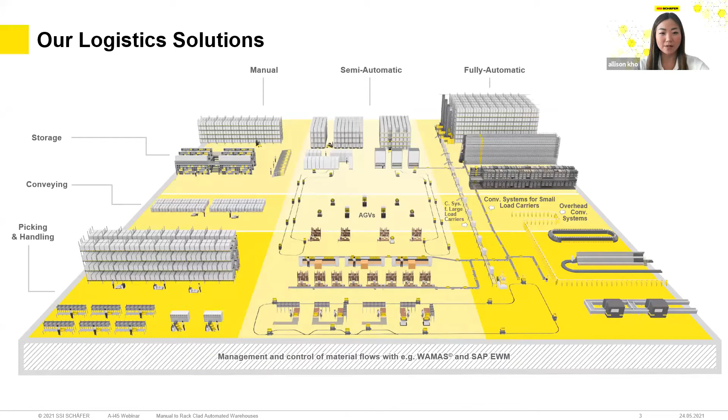With over 83 years of experience, you can find SSI SCHAEFER across 6 continents. The headquarters is based in Germany, and the regional office for Asia Pacific and Middle Eastern Asia is based in Singapore. A short drive across the causeway, you can find SSI SCHAEFER Asia's own production facility based in Malaysia, Simpang Renggam.

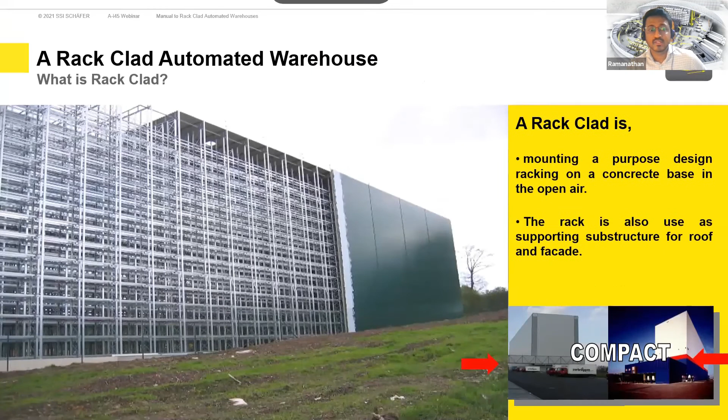Number 5 is space utilization. In many cities, space is always a constraint. Therefore, optimum space utilization inside a warehouse is necessary. Are you using the space efficiently inside the warehouse?

Number 6 would be the collaboration between robots and human beings. Is there a warehouse management system inside your warehouse that can act as a bridge between your inventory and operators? These are the questions that will get you ready to future-proof your warehouse.

Thanks, Ram. So bringing back to future-proofing a warehouse again - earlier on, Chan, when you said about having to have rackings in a warehouse itself, we talked a little bit about the size of the warehouse. Perhaps can you share a little bit on this detail?

Sure, I would love to. When I started with SSI SCHAEFER 26 years ago, we were excited to have a 25-meter high, 10,000 pallet location warehouse project. Now we are talking about a warehouse size of 100,000 pallets at a height of 40 meters or more - almost double the height with 10 times the storage capacity that we would never have thought possible back then.

I agree with Chan. The inquiries that we get these days are for more than 100,000 pallet locations, and this was not even the case 5 years back. Exactly. This trend translates into the bigger the warehouse, the better it is. And the Rack Clad solution has the edge to build big, so the demand for Rack Clad warehouses will grow.

Chan, sorry to interrupt - so you mentioned Rack Clad warehouses. For the benefit of our audience who are not very familiar with this term, do you want to explain what a Rack Clad is in layman's terms?

Okay, in this case, let me ask Allison a question first. Why do we have racking in the warehouse building? I think it's just purely to store pallets, and that's why we need the rackings. Okay, now imagine this: what if there is no building? Can you have the racking in place? This is what we call a Rack Clad.

It's a self-supporting storage rack system that can withstand environmental forces and at the same time can be used to support the roof and wall facade. Due to its self-supporting nature, Rack Clad does not require building columns, and this makes the Rack Clad solution more compact compared to conventional warehouse solutions.

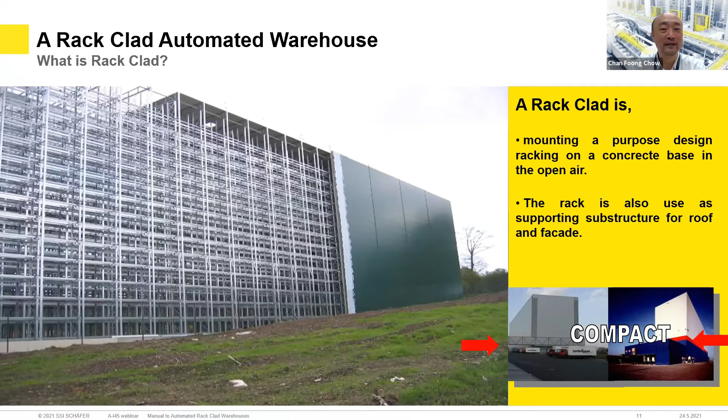Wow, this is always an expectation from our customer. Of course there will be cost saving from the total Rack Clad investment, but not all of it is from the building cost. Since the Rack Clad solution uses a smaller footprint, you can actually achieve additional saving from areas such as cost of the land and the land tax as compared to a regular building itself - this is the additional benefit.

Normally, racking inside the building is not affected by external factors such as rain or wind. But for a Rack Clad warehouse, this is not the case. Therefore, comprehensive detailed engineering must be done on the racking design to consider the impact of wind and rain through years of operations. We make sure it is safe to install the racking system in an open air environment, and that it is stable to take all the external loads.

One of the key elements of the Rack Clad solution is the construction time. We can usually start the project early when the first step is ready. But for the indoor high bay warehouse, you can only start the installation when the building is complete.

So we are looking at a head start of 6 to 9 months for a Rack Clad installation. Chan, this is a very important point, but can you explain in detail why should we wait until the building is finished before we can start with the indoor racking installation?

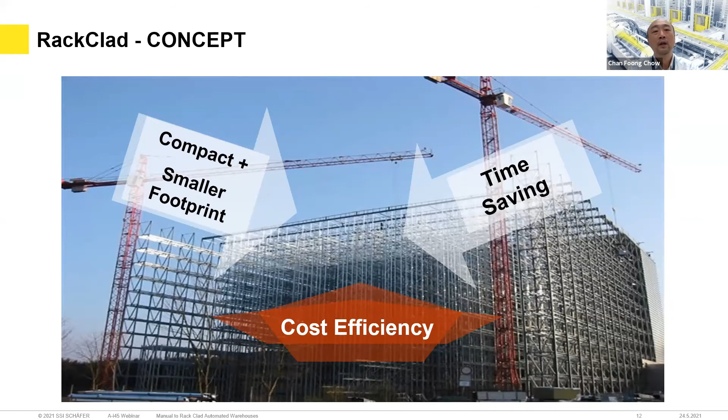Not really the case. In contradiction to your thought, they are actually huge. Instead of using the land space, a Rack Clad solution uses the air space. When we compare a 45-meter Rack Clad to a conventional warehouse of less than 15 meters, the land space utilization goes best with the Rack Clad solution.

Using the smaller footprint, the other fields of service such as chiller unit and M&E services will be scaled down accordingly. Chan, the question we face often is, what is the limit for such Rack Clad warehouses?

Can we build anywhere else in the world? I mean, what if the wind speed is extremely high, or what if there is high seismic activity? Can we still build it?

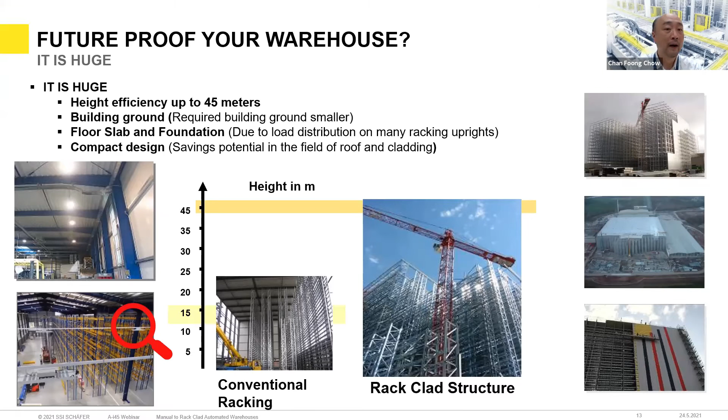The quick answer will be, we can build a Rack Clad warehouse anywhere in the world. But to operate from anywhere in the world, we first need to look at some geographical boundaries that we face in planning for Rack Clad infrastructure.

Over the last few years, the occurrence of earthquakes and typhoons has become more frequent. As you can see, this year alone, 21 typhoons have hit the Philippines.

Last week, we had feedback from our Indonesia side. There was a 6.2 magnitude earthquake that happened just 30 kilometers away from our site. When I talked to my team, they told me they could feel the earth shaking when the earthquake happened.

So you see, to address situations like this, our experienced engineering team will assess and analyze the local requirements in the region and design the Rack Clad warehouse accordingly.

And then the complete set of bracing towers of the Rack Clad structure for total system stabilizing purposes. Due to the impact of soil, wind, earthquake, and different local authority requirements, we need to address every project differently because of these variances.

I see, Chan. Another question for me: if two projects require the same amount of storage capacity and use the same type of pallets, but are located in two different locations, can we assume the Rack Clad designs would then be different?

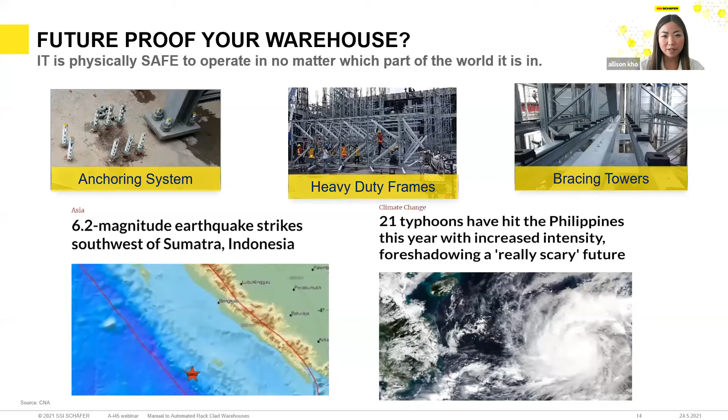You got a point, Allison. This is absolutely right. Geological phenomena are key elements in Rack Clad warehouse design. A warehouse next to the sea or river could sometimes have a completely different key design criteria compared to two projects with similar loading weight.

This is largely due to the soil type and influence of the surrounding facility. Basically, no two projects are similar. Even with the same loading weight, the condition will still be influenced by different soil types and wind speeds that will change the profile selection and steelwork connection details. A complete comprehensive static analysis report using standard codes of reference will be needed accordingly.

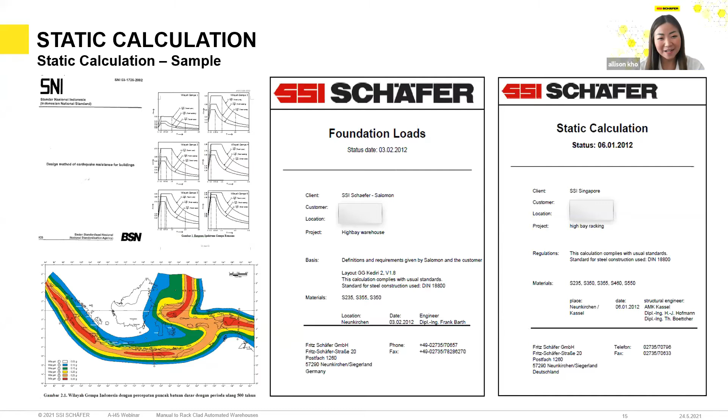Right, Chan, it seems like the Rack Clad concept isn't that simple after all. Perhaps you can help us better understand these basics quickly. In this case, let's look into the concept of Rack Clad quickly.

In summary, a Rack Clad starts with a fully connected single block rack structure. Since it is a purpose-designed solution that connects racking elements such as racking frames, loading beams, roof trusses, gable wall, and the spacious steelwork all together, it becomes a complete stable single block racking structure which will take the impact of wind and earthquake according to different local standard requirements.

As you can see, elements such as roof trusses, walls, and roof supports that are usually part of the building scope are now integrated into our Rack Clad solution, making it more cost-effective than a rack solution within a building. Okay, so that means no building columns, and which also means no wastage of pallet locations. Yes, there are no building columns.

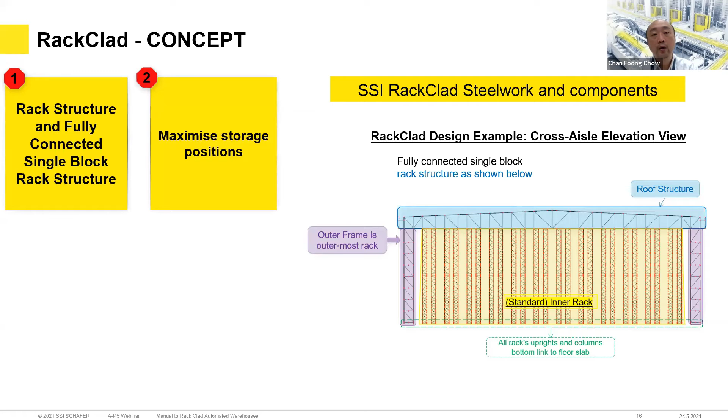Then this brings me to my second point. You do not need to consider the clearance between rackings, building columns, and building walls. The steelwork boundary now becomes the footprint, and the space needed for the columns is now made available to us easily. We can easily translate this space into more pallet positions.

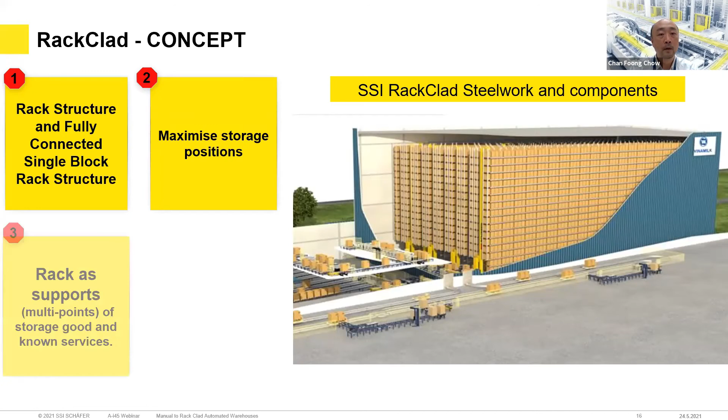My third point: since conventional buildings usually make use of a long span of unsupported roof truss, these trusses are normally made from a hot rolled profile, which is bulky and heavy. Instead, Rack Clad uses racking to support this additional element. This means both loading weight on the floor and roof will be distributed to more upright supports, benefiting the structural design with more efficient use of steel.

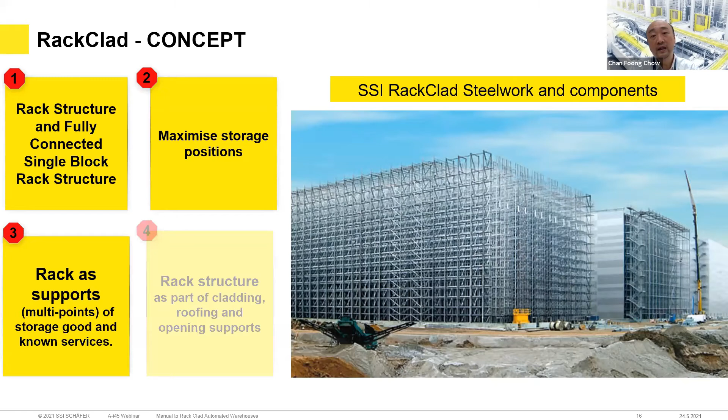But Chan, why does it matter whether the weight distribution is spread across the entire roof? Well, I would like to share one incident that happened in 2014. Volcano Kelud in Kediri, Indonesia erupted, causing volcanic ash to drift across Java and accumulate on top of our customer warehouses — about half a meter high of volcanic ash on top of the roof.

The rain made the situation worse. The ash absorbed the rainwater and became an additional load on the roof truss. A lot of conventional warehouse roofs collapsed due to this volcanic ash and rain accumulation issue. However, those Rack Clad warehouse roofs did not collapse, since the extra load was evenly distributed to the racking with the cross supporting pitch. This is very true, Chan.

So in a conventional concrete building, we have very few columns that take the entire load of the structure, and this is not the case for Rack Clad buildings. Because every upright in the racking is going to share the load, is that right? Exactly, Ram, you got the point.

Since the roof truss is fixed directly above the racking frames and aligned to the racking bay pitch, the Rack Clad structure takes into consideration the opening and load for M&E services in the design — for example, sprinkler systems, smoke control systems, temperature control systems, and the needed ducting accordingly.

These roof trusses are normally made from a high tensile cold form profile instead of hot rolled steel. This gives us more flexibility to use a lighter profile to integrate M&E services and openings onto the roof trusses, steel structure, and wall penetration accordingly.

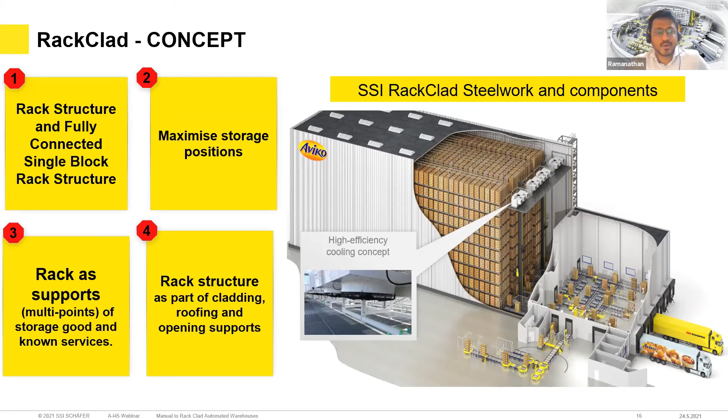How do you measure this and include the right automated storage systems in this facility itself? Yeah, sure. So from an automation perspective, it is most often complicated when you need to plan a storage system inside a building. Why? Because of the pillars. We need to make sure that the pillars don't interfere with the movement of the cranes, or the position of the conveyors. And also you need some kind of gap or clearance between the pillars and our components. All these are wastage of space at the end of the day, and all this can be eliminated in a Rack Clad building.

We've done a small comparison here, as you can see on the screen, between an in-house ASRS and a Rack Clad building. Both have the same plot size of 100 meters by 70 meters at a height of 35 meters, and both have the same double deep ASRS solution. As you can see, a Rack Clad building is able to achieve 10% more locations compared to the in-house ASRS building. This is only a rough comparison, taking into account the pillars or columns in the building.

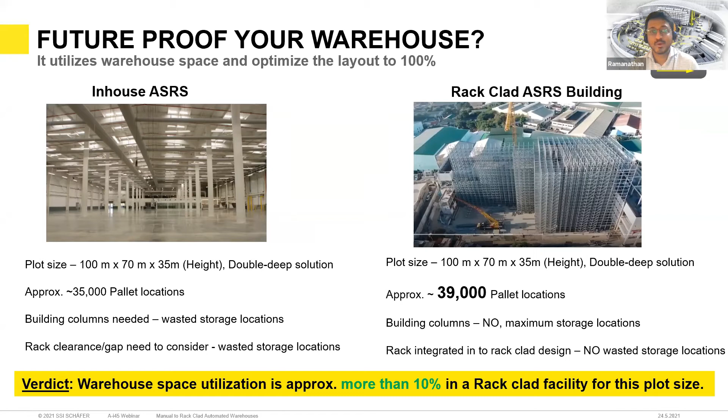That's a very good question. But with the current globalization and massive growth in urbanization, businesses want to be closer to the customers more than ever, especially for last mile operations. We talked about e-commerce before. When you take big cities like Mumbai, Jakarta, or Manila, it is more or less similar to Singapore or Hong Kong in terms of land space. Therefore, a Rack Clad solution is still suitable for these countries.

The project we realized in Manila is a very special one, especially because of the challenges we faced in terms of realization. Chan was heavily involved in it, so maybe he can explain in more detail how he was able to realize those projects.

We have built two 45-meter high cold store warehouses in Manila. One of them is being used to provide proper storage for the COVID-19 vaccines. In terms of realization, we were faced with a few challenges: one being the site is about 300 meters away from the earthquake fault line, and the other was having to increase the wind speed consideration up to 270 kilometers per hour during the project implementation stage. But somehow we were able to tackle these challenges and provide a successful installation to our customer.

They are more competitive since the footprint is kept as compact as possible, while we use the maximum airspace that is possible. All of them have seen a good 30% reduction in construction time, giving them a great advantage of being closer to their customers. Thanks, Chan, for sharing about the two projects we had in Manila.

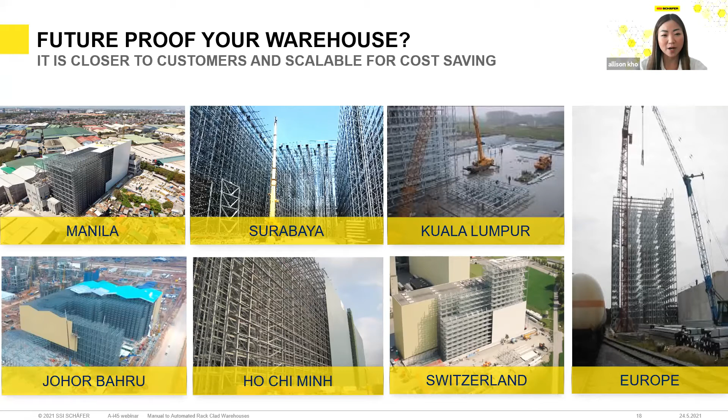We'll start with the inbound process. We planned an automatic stretch wrapper followed by an automatic labeler. These repetitive processes are very beneficial for the customer in the long run. Now let's see the video. You can see the pallet moving inside, here the automatic stretch wrapper followed by a labeler, and once it's done, it goes inside the ASRS.

One more point is it's always time consuming to bring pallets up and down to different levels in a warehouse using cargo lifts. But when we plan a conveyor integrated with lifters, the process becomes much faster and smoother, and this is exactly what we have done for the customer. Now let's take a look at the video. You can see here the pallets are brought to different levels by the lifters for processing.

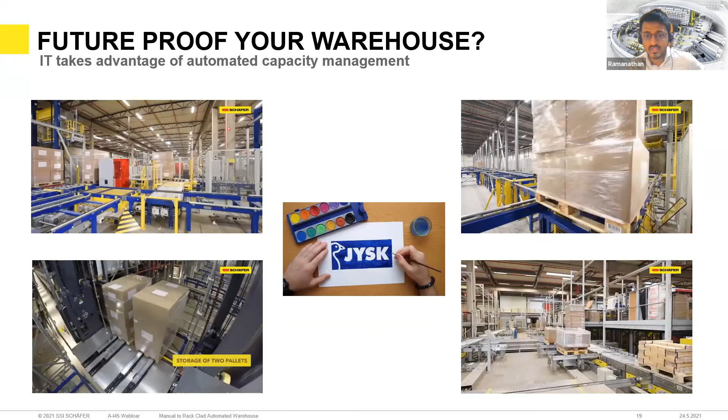One more interesting point about this project is that the cranes are able to handle both standard European pallets and non-standard pallets, which are almost 2.4 meters in length and weigh almost 2 to 3 tons. The crane technology we use here is called double mast cranes, which are useful in handling these non-standard or heavier pallets. As you can see, these 2.4 meter pallets weigh 2 to 3 tons, and the same crane is able to handle 2 standard European pallets as well. This is the biggest advantage for the customer - they can handle both these pallet types in the same aisle using the same crane.

As a customer, it is for you to analyze the current situation in your warehouse and see how many hours are being spent by a worker to paste a barcode label onto pallets, or stretch wrap a pallet manually, or how many kilograms an operator is picking every hour, or what is the traveling time for the worker to get to the right product, and what would be the benefit if these things are automated inside the warehouse. These are little things that can get you ready to future-proof your warehouse.

Hey Ram, can we incorporate these automation systems in a deep freeze environment? Well, of course, yeah, obviously we can do that.

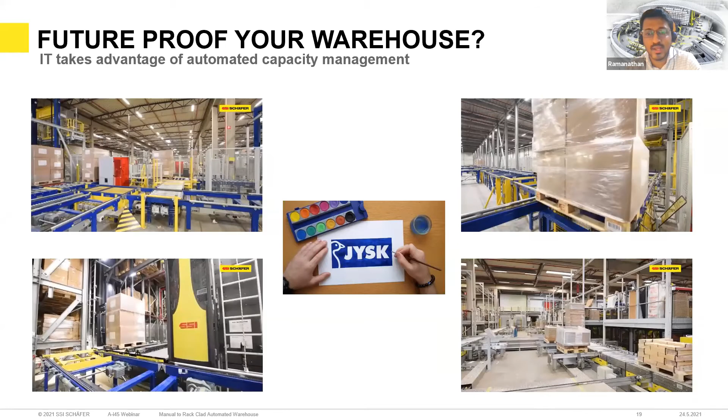The next example I'm going to show you is for our customer Medibel, a food and beverage client, another trusted customer of SCHÄFER, and we built this beautiful facility for them in Belgium. This facility itself is operating at minus 24 degrees Celsius.

Now there's another element - here we have the slaving and deslaving unit. When it comes to pallets, there are a lot of factors that need to be checked - the material, the quality, the deflection, the dimensions, etc., before entering the ASRS system. So if there is a standard slave pallet inside the warehouse, the customer doesn't have to worry about what kind of pallets are coming in from the suppliers. The pallets from the clients will sit on top of the slave pallets or system pallets, and this process of putting a pallet on top of a slave pallet and vice versa can also be automated. This is exactly what we have done for this customer.

Ram, when we talk about the slave pallet, our customers from the 3PL industry are very familiar with the system. Yeah, not only in their warehouse - most often they handle different types of clients, and each client can have different types of pallets. So to standardize, they often use a slave pallet inside their warehouse easily. Yes Chan, 3PL is a very classic example for this operation.

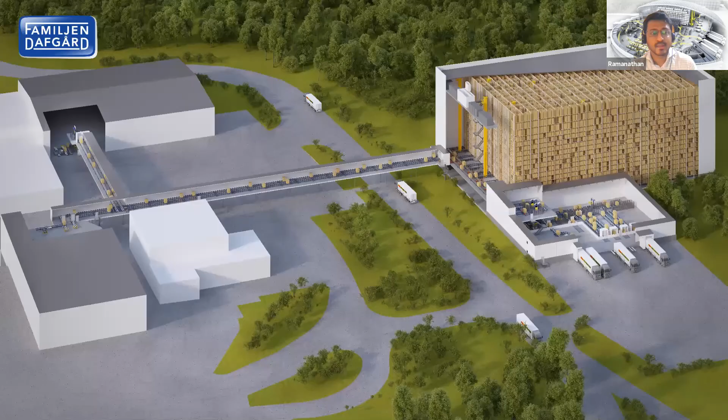Moving on to the next reference, this is also a deep freeze facility for a customer called Dafgård. He's a customer in Sweden, also a leading player in the food industry. As you can see, they built a warehouse next to the production facility. To ensure smooth transportation of goods from the production facility to the warehouse, they built a sky bridge to connect both these facilities, so pallets can be transported by a long stretch of pallet conveyors. Just imagine the amount of time it would take for the process to work if there were no sky bridge.

These sky bridges are very useful for such operations. As you can see, the conveyors are not on the ground, but placed on a mezzanine a few meters up. This ensures the conveyors from the bridge are connected directly to the ASRS system and not to the lifters that bring pallets up and down, so we always ensure the customer gets the best solution for future-proofing the warehouse.

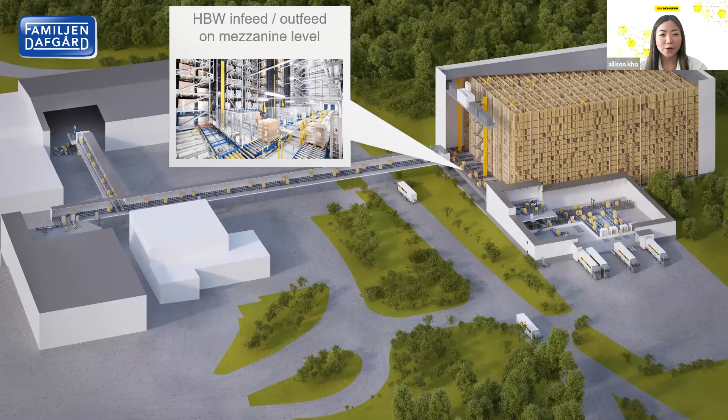Exactly, Allison. This is what we are trying to plan inside the warehouse. Whenever we hear the term robotics or automation, we imagine this is how the warehouse is going to look, which is not quite true. If you're thinking of robots taking over the world like a Matrix movie, it's not as dramatic as you imagine, but rather the images you will see now are the reality.

The idea is not to remove human operation from the warehouse, but to make life easier for the operators working inside. They should not worry about the tons of paperwork for every inbound and outbound operation, which is why we recommend a good warehouse management system in place.

They should also not worry about picking the wrong items. Handling errors is a very tedious and time-consuming process inside the warehouse, so with the sensors and the WMS that we provide, errors can be minimized as much as possible.

And last but not least, the ergonomics. Nobody wants their employees reporting sick every month because of back pain or neck pain, which is why we design picking stations as ergonomic as possible, making sure the operator doesn't bend too much or lift too much. There is a lot that is taken into account when we formulate such a solution.

I see. Speaking of harmonizing material flow between machines and humans, I recall a local Rack Clad ASRS project we both did for one of Singapore's homegrown service providers just a few years back. Was it one of Singapore's biggest ASRS facilities? Yes, it was one of the biggest ASRS facilities in Singapore.

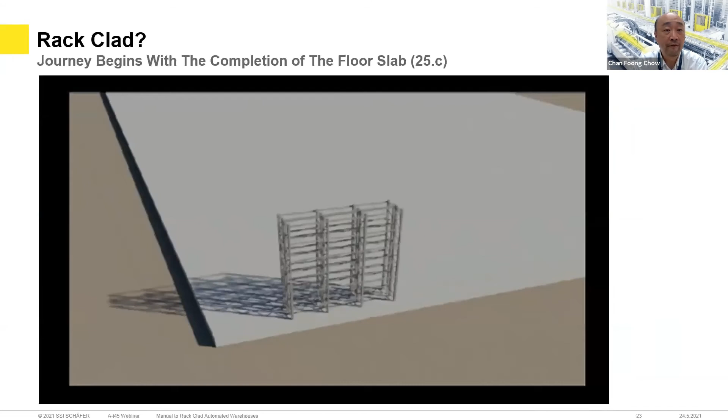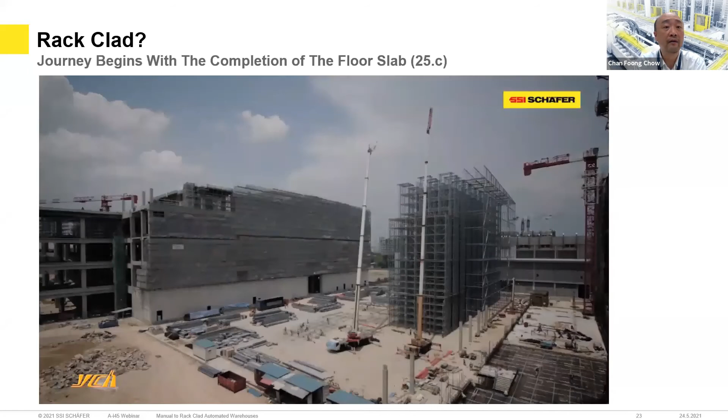Let's look at the video now. We start our work in an open air environment. First, put the racking frame and then assemble them into racking blocks. All these assembly activities are done on the ground level. Once the structure is up, we stabilize it before putting up the higher racking blocks, completing it with the roof truss installation. As you can see, a lot of activities are happening on site, including the installation of the sprinkler system.

And Chan, these red pipes shown in the video, I assume these are the sprinkler pipes. Wow, Allison, you really pay attention to the video.

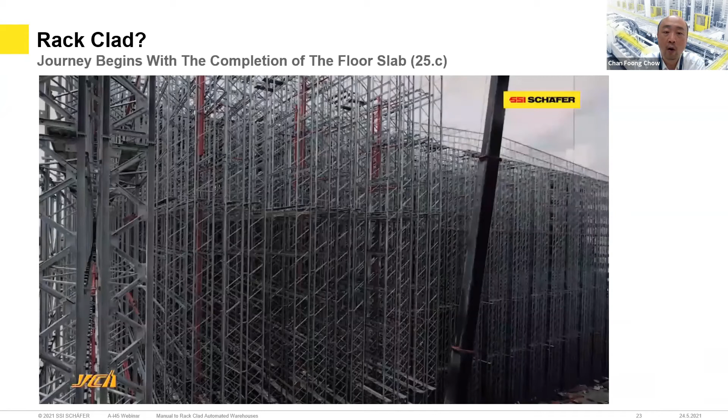Some projects might have other installations proceeding concurrently with the rack clad installation as well. Once a minimum of 2 main bracing towers set in length are properly installed and aligned, or 50% of the warehouse length is ready, other installations such as wall, facade, and M&E contractor work can all begin concurrently.

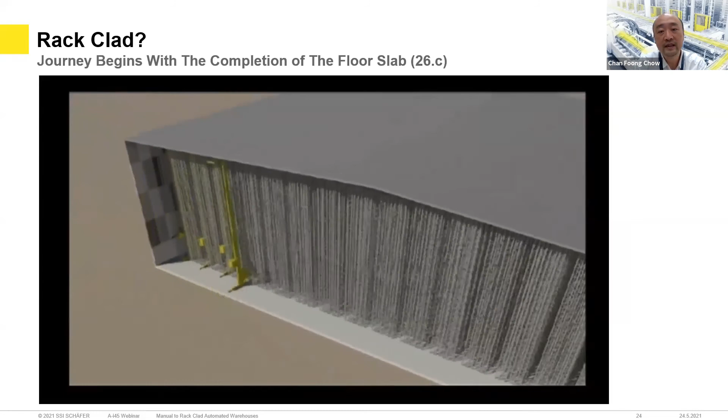As long as the warehouse wall and roof are more than 50% covered, achieving watertight condition on the front zone where the conveyor system will be located, the storage and retrieval machine from the remaining opening area can be installed as well, together with the conveyor system installation.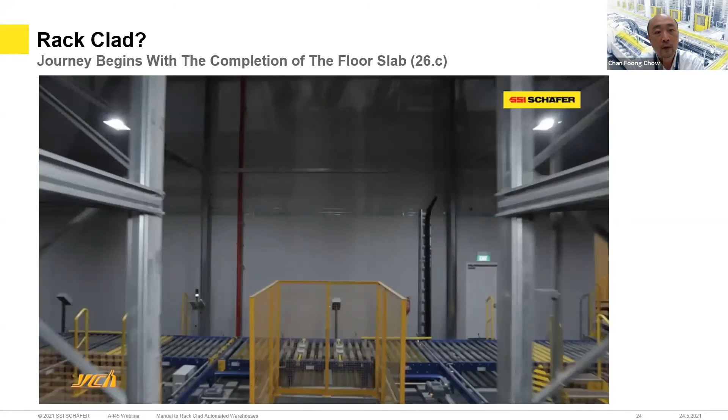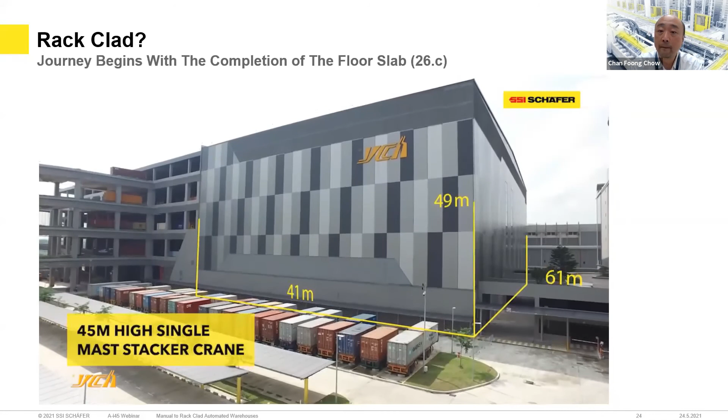The commissioning of the complete 18 sets of crane and conveying systems, with more than 66,000 pallet positions, can be achieved as per project plan. Thanks to our highly accurate manufacturing process, this also assures extremely accurate alignment, minimizing the time required to complete the plumbing and alignment of the racking for a 50-meter high rack clad structure like this.

With early start of the rack clad installation and fast rack installation speed due to no lifting height constraint, once the rack clad roof and wall are fully covered, the installation team and M&E contractor can start system test and commissioning much earlier compared to an indoor warehouse solution.

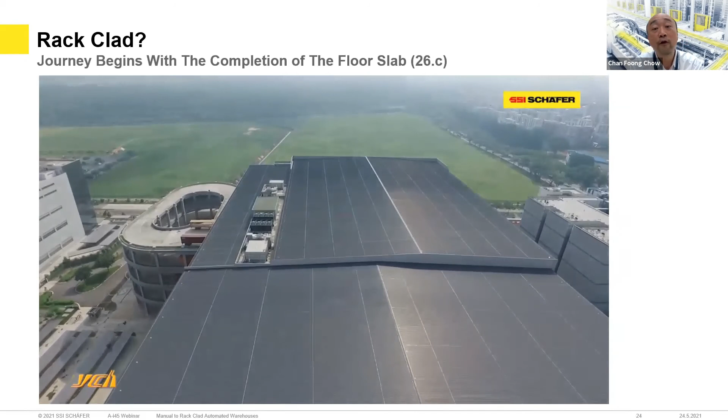This enables us to complete this mega rack clad warehouse, close to 4,000 tons of steel, including roofing and wall cladding works, in just 9 months.

Well, that is a really remarkable facility. And another question, Chan: if a rack clad structure like this is already built, how possible is it to expand the warehouse infrastructure in the future? This is a good question.

We will use an example to show how a project can carry out an expansion plan in phases. It can be immediate or with a few years interval. Both can be achieved with a rack clad solution.

This customer built the first warehouse next to their existing plant. While we were completing the first warehouse, the customer continued the plan with a second warehouse. Most importantly, the whole site looks clean and very organized compared to the conventional way of building.

This is because all components are prefabricated in our factories, and we only carry out the assembly and erection works on site with our professional site management team.

With the current pandemic situation, traveling and available resources become a new challenge we need to face in project execution. Our local SSI SCHAEFER office will play a very important role to ensure the availability of resources to the project. With their local presence and contacts, we can work out the mitigation plan to address these challenges.

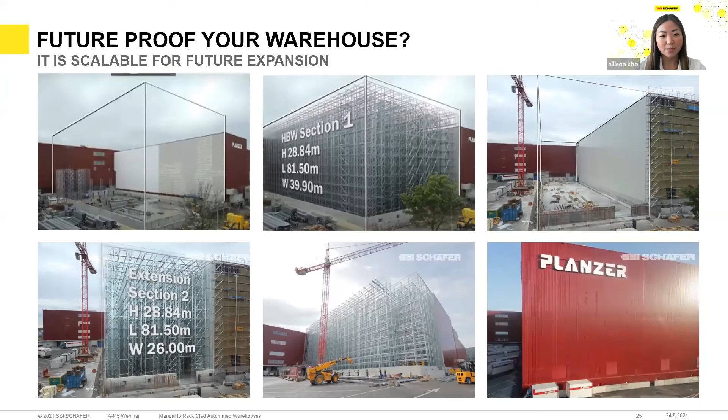Well, I'm sure that the project management team is very crucial here, isn't it? So before we go into the details, maybe you can share with us how your team typically works with clients on a facility this huge.

I'm very proud to say our project managers are all International Project Management Association, in short IPMA, trained. We always refer to the project management triangle as our guide, which contributes to scope of work, cost or resources available, and the project time schedule.

This is a typical flow of how our project team manages the project with their client, their consultant team, and the supplier. First, before the first meeting, the customer and their main consultant, normally an architect, sit together to build the criteria for the overall warehouse plan.

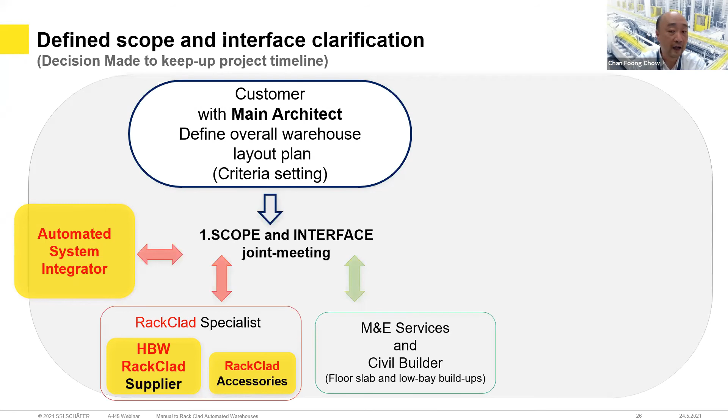Next, at the scope and interface joint meeting, the suppliers such as automated system integrator, rack clad specialist, and civil builder will come together to define the individual scope of works and address project issues related to architecture, M&E services, automation system, and the main building works.

Once all stakeholders agree on the implementation process and timeline, the customer and the consultant team will proceed to work with everyone and orientate the team towards the goal.

Thanks for sharing with us a little bit on how it works, Chan. And is rack clad warehouse then suitable for everyone, regardless of which market sectors they are from?

Pretty much everyone can use a rack clad warehouse. Ram and I have put together a simple checklist for anyone to evaluate the possibility of rack clad in their future expansion plan. First, a project with clear business vision and planning would be very critical since it integrates different suppliers.

Suppliers from facilities, services, and warehouse automation system. Usually, we will all be aligned to the customer's ultimate vision.

Second point, a strong project management team is needed, not just from the supplier. Client-owned project management team will be empowered to ensure they can align and orientate the team towards the company mission.

The suppliers are coordinated closely to propose a plan for concurrent installation before the actual work starts. Do expect a lot of regular coordination meetings needed to address design and site matters for detailed installation interface during the planning and project execution stage.